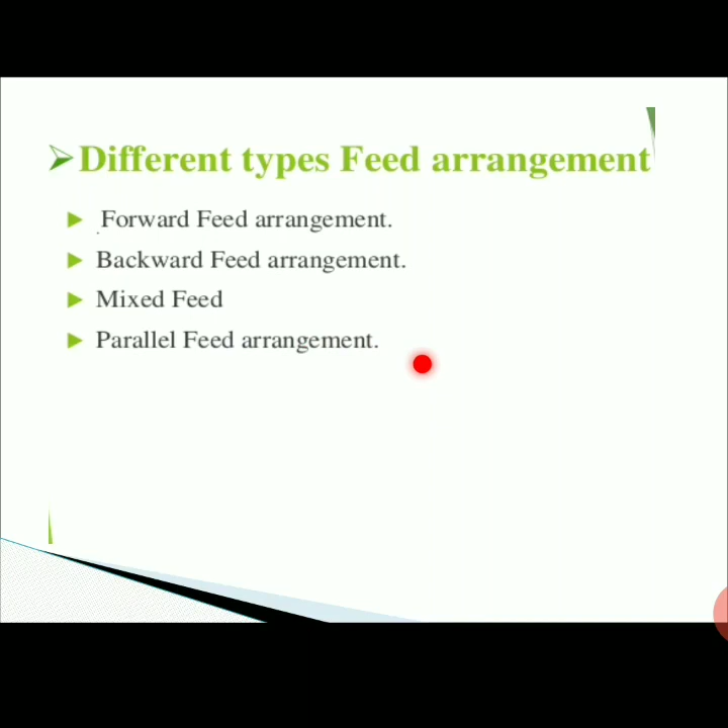So here, it is a forward feed arrangement. In this method the feed moves from first to second and second to third, means it is transferred serially. Here the feed moves from high pressure to low pressure chambers, and therefore pumping is not required, and the product is obtained at a lower temperature. Here T1, T2 and T3 temperatures. So the product is obtained at the lowest temperature, that is T3, and this method is suitable for scale forming liquids as well as concentrated products subjected to low temperature.

Also this method is not suitable for cold feed because the steam input in the first effect will be used mainly for raising the temperature of the feed, and thus the amount of vapors produced in effect 1 is low. So that's why we can't use cold feed in the forward feed arrangement. Also the lower amount of vapors in the first effect results in lower vapor production in the second effect and so on. So this will hamper economy. This is all about the forward feed arrangement.

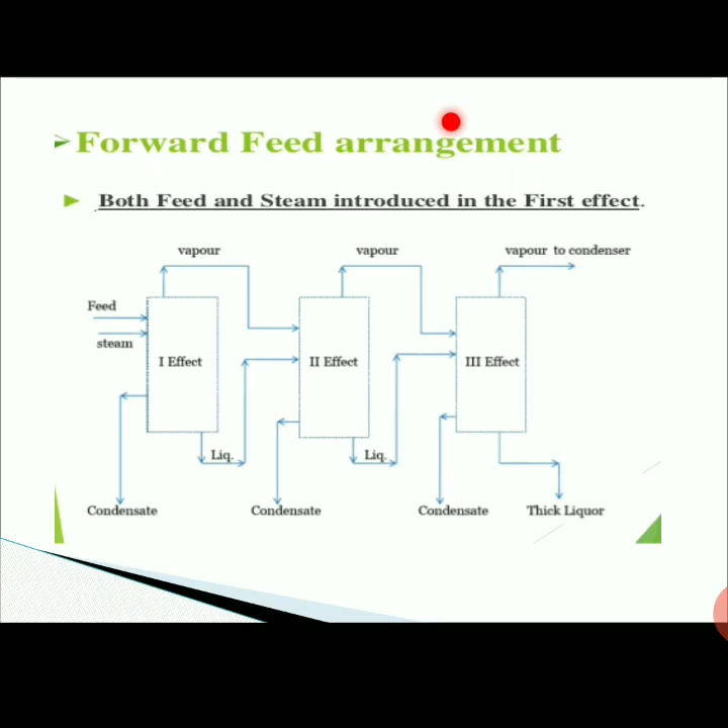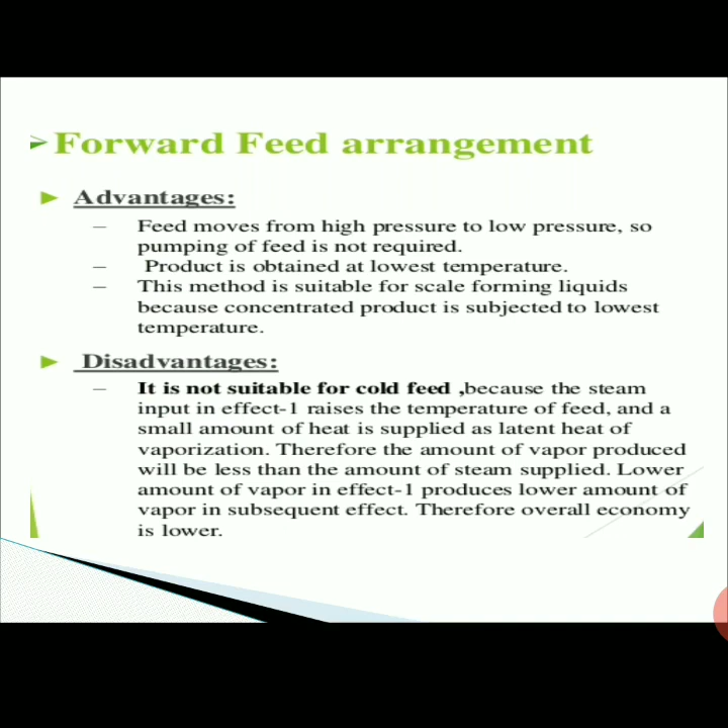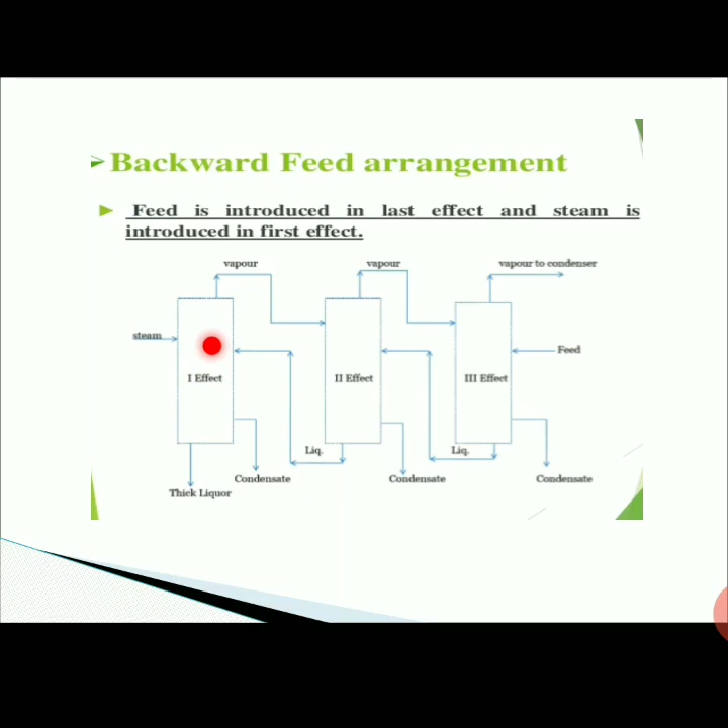Then here this is the backward feed arrangement. In this method the feed enters the last effect, that is the third effect in case of triple effect evaporators, and moves from third to second and second to first, means feeding occurs from the backward side. Here the feed moves from low pressure to high pressure. As we discussed, in forward feed the feed moves from high pressure to low pressure, but here it moves from low pressure to high pressure, so pumping is necessary and the product is collected at high temperature, that is T1. In forward feed the product is collected at T3, and in the backward method at T1.

So it is suitable for cold feed; it will give more economy. Also this method is suitable for viscous products because the highly concentrated product is at the highest temperature and hence lower viscosity occurs. It is suitable for cold feed because the heat used for increasing the temperature in the third effect has already been used for heating a number of times. So this gives more economy. And at lower viscosity, heat transfer and in turn capacity will be maintained high in this backward feed arrangement.

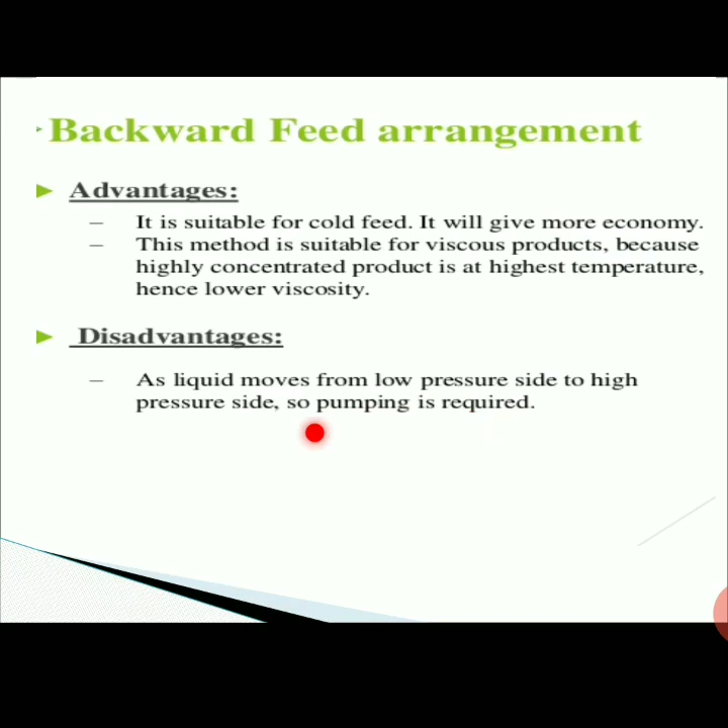And here what is the disadvantage? As liquid moves from the lower pressure side to the higher pressure side, pumping is required. This is the main disadvantage of the backward feed arrangement. Then next is the mixed feed arrangement. In that, the feed enters the middle or the intermediate effect.

Intermediate or middle effect and moves forward, and then to the initial effect, that is 2 to 3 and 3 to 1. Means here, in this, the second evaporator transfers the feed towards the third evaporator, and then the third evaporator forwards to the first evaporator. So here the mixed feed arrangement occurs.

It is advantageous as the liquid moves from high pressure to low pressure here. Here liquid is moved from high pressure to low pressure in 2 to 3, second to third, and then product is obtained at high temperature and low viscosity from the first effect, that is T1 temperature and P1 pressure. So what are the advantages?

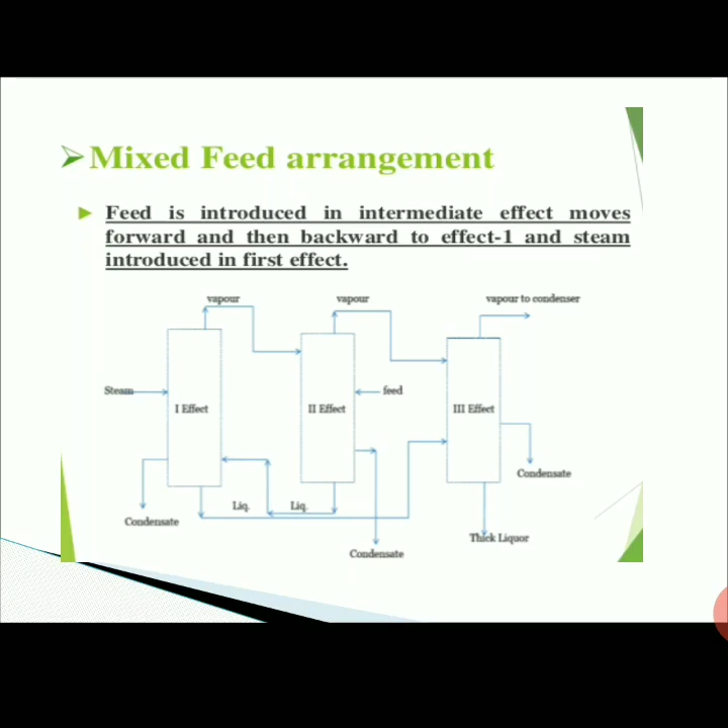The pumping of liquid is required only when liquid moves from low pressure to high pressure. So the product is obtained at the highest temperature, hence lowest viscosity occurs. And what are the disadvantages? As liquid moves from low pressure side to high pressure side, pumping is required, which is a disadvantage of this mixed feed arrangement.

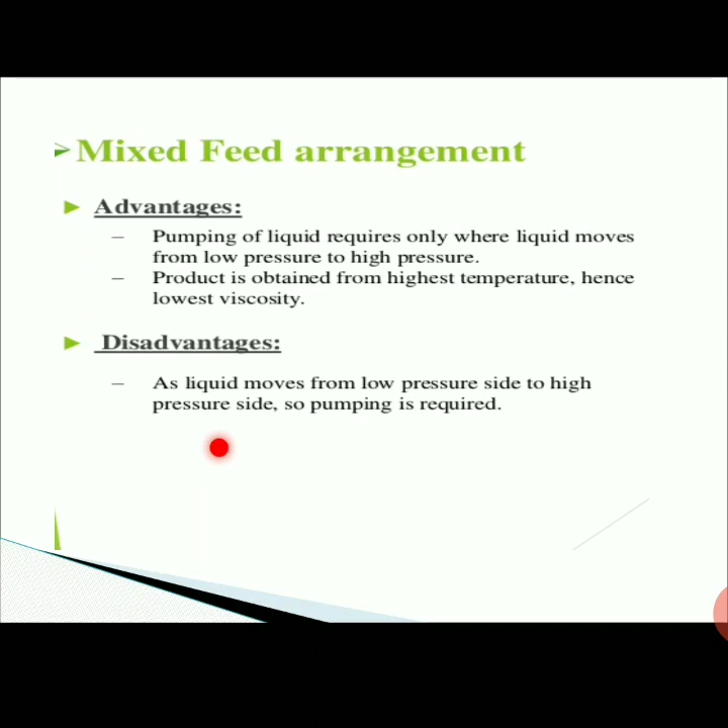So this is all about the working of multiple effect evaporator with the multiple arrangements. Then this is parallel feed arrangement, which we already discussed in detail. Then what are the applications of multiple effect evaporator? Here the product concentration is high in this multiple effect evaporation.

Also solvent volume reduction is a solution here, and the water and solvent recovery is more, and also crystallization occurs. So it is suitable for large scale and for continuous operation. Also it is highly economical when compared with single effect evaporator. 3 to 5 evaporators can be attached in a series. What are the advantages in this?

This is an advanced system, and also it is very easy in operation and maintenance. Also the operations are cost effective. In the single effect evaporator, 1.2 kg steam is used, and in double effect evaporator 0.6 kg steam is used. Here steam is used in kg per water evaporated if TVR is used.

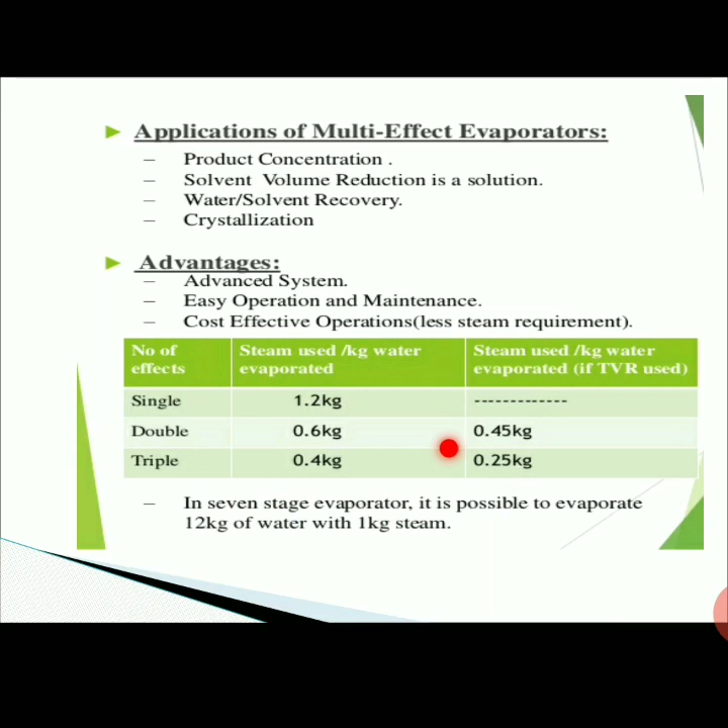Then the last point of this multiple effect evaporator is the economy of the evaporator. The economy of an evaporator is the quantity of vapor produced per unit steam admitted. It can be calculated by considering two assumptions. The first one is the feed is admitted at its boiling point, so it does not require any more heat to raise its temperature.

Hence the supplied steam gets condensed to give the heat of condensation. Then this heat will be transferred completely to the liquid. The heat transferred now serves as the latent heat of vaporization, that is, the liquid undergoes vaporization by receiving the heat. This is the first assumption. And the second assumption is that the loss of heat by any means is negligible.